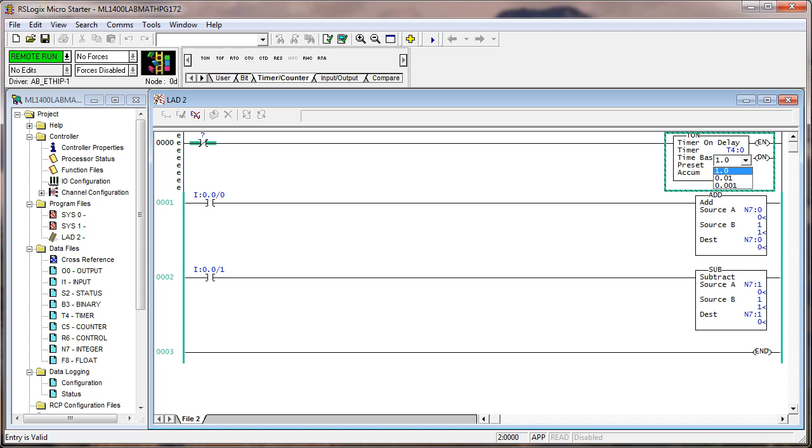Just a little aside from what we're doing here, I'm going to set these back to 0. And I'm going to add some logic. This is how you experiment and learn. So I'm going to do a true if off, then I'm going to add a timer, and we'll make it T40. We'll take a time base of 1, a preset of 1, and then the done bit.

So now we have a free running timer. What's interesting is you can't see it doing anything. Every once in a while you'll see the done light flicker right here. You might see that flicker depending on the synchronization between the video card and the computer, the driver to the controller, and screen update time and everything else.

I'm going to go back and change this. I replaced the true if on input 0 for the add instruction. I replaced it with a timer timing pulse, and the timer is controlled by that input. So when I push the button, the timer timing pulse is true for 1 second, and the add instruction incremented from 0 to 3,397. If I let go of the button, I have a clear instruction that is clearing N70.

So every time I push down that button, it's going to increment and count how many scans occurred during 1 second. What's interesting is it doesn't always come out the same. It comes out pretty close. Let's say that's 3,400.

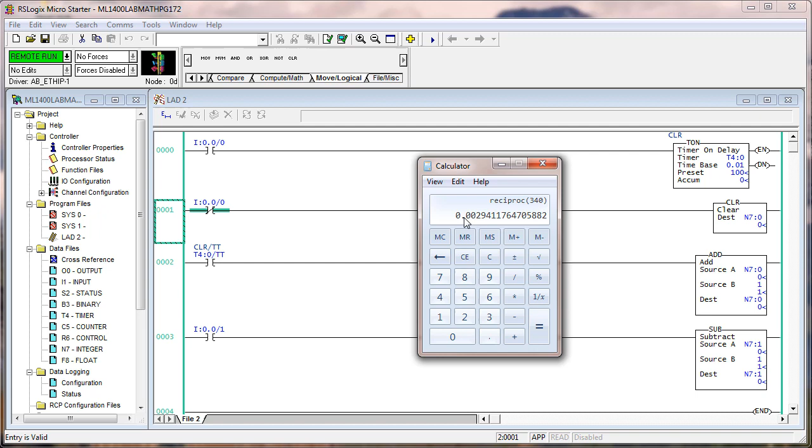Now, if the exponent bothers you, you can always knock a 0 off, do 340, take the reciprocal, and see you've got 0.0029. But we only did 340, so if you consider the additional 0 for 3,400, that moves the decimal place over 1 more place, so it's 0.000294.

That's just a little bit aside, but here's an example of where we're using an add instruction to measure an event count. In this case, it's a scan counter. I don't see any real purpose for a scan counter. There's a zillion other ways to come up with something that'll do the same thing a lot easier than this.

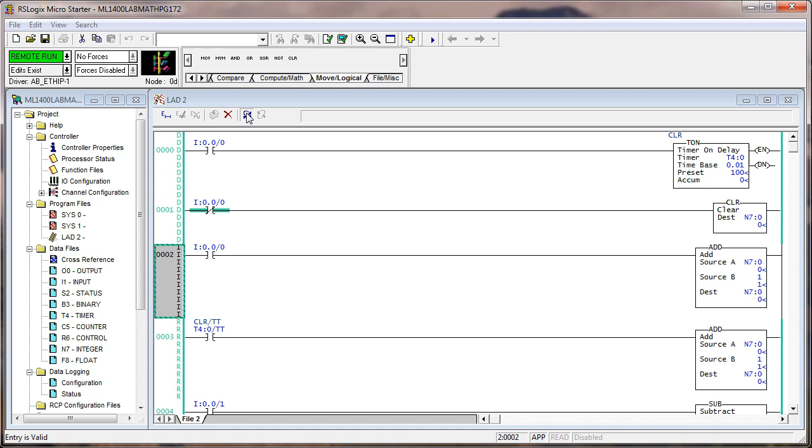We don't want a scan counter, so I'm going to delete this rung, and I'm going to put this in the edit mode and bring this down to here. I meant just to drag the address. Delete this rung, and I've got one rung here that has to be fully accepted. And now we're back to our add and subtract.

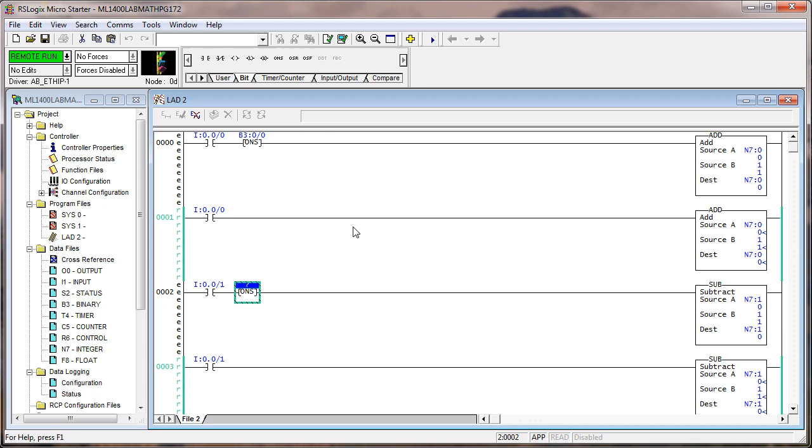The next thing I had you do was to throw a couple one-shots in there. So we'll put these back in the edit mode. We go up, and we put the focus here, one shot B3/0. Go down here and do the same thing, one shot B3/1.

Select that, Control Select, accept. Now we repeat the process of pushing in the push button or turning on input 0. See, it increments by 1. As I can hold it down forever, it's only going to execute one time.

So now we have the add instruction behaving identical to the counter data type, except that we don't have a done bit. Now, as we have an accumulate value that is accumulating the events of the false to true transition to the left of B3/0 one shot, and then the same for decrementing.

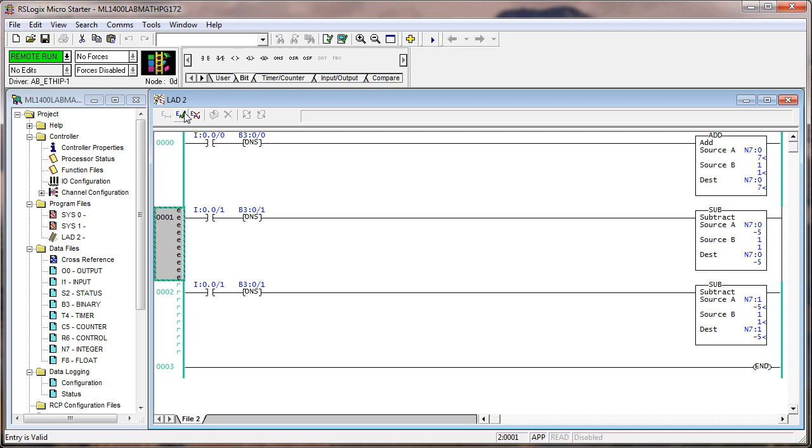If you wanted to make this an up-down counter, we would just change this to N70. That way we're working against the same integer value. Just like the accumulate is a signed integer, so is N70.

Now personally, I use one shot add subtract for my increment and decrement in almost everything that I do. I don't know how many other engineers do that. I did that because originally the counter data type, with that little nuance, if you create a new one online, that it counts once. It used to be worse than that.

That's the only thing you have to worry about now, is if you create a new counter instruction, and if the rung is true, when you complete the edit, it will increment by 1. I don't need a done bit. If I want to do something on a particular count, I'm going to add another rung of logic, and I'm going to use other instructions that you've worked with.

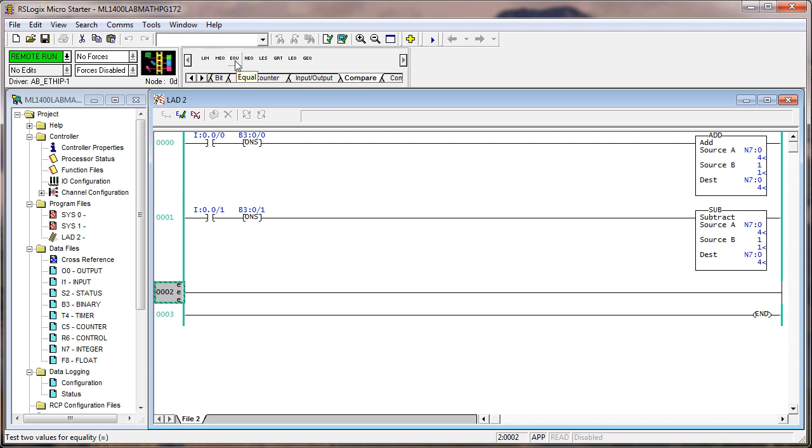For instance, if I use the equal, then it'll only be true when it's equal to that. If I use greater than or equal to, then it will behave like the done bit, so to speak. Of course, I have to throw an output on this, and we'll just use any old bit, we don't care.

And so I'm going to say N70, and by the way, I don't have to type it in, I can drag it over there. If you can see it, you can probably grab it and drag it. You're not really grabbing it, you're grabbing a copy. If these rungs were in the edit mode, then you got to be careful what you grab and drag, okay? But if I point and drag, and this is not in the edit mode, that's exactly what's going to happen. I'm going to get a copy of it.

So let's say we want a preset of 10. And by the way, if I want that preset to be variable in the run mode, then what I do is I just type in an integer address. Now, right now, obviously, 4 is greater than 0. So let's put in our preset of 10. See, now it's not true and that bit is off.

If I increment, see, at 9 that bit's not on. At 10 it is on. At 11 it's still on. See, that behaves just like the done bit in the counter data type. If I increment down below 10, it goes off.

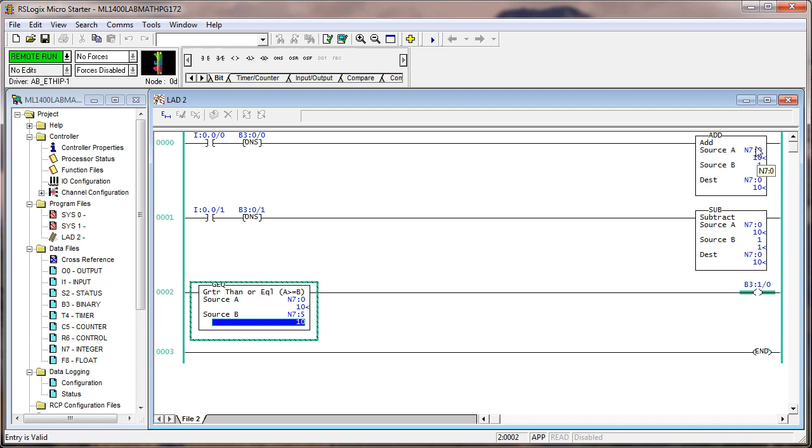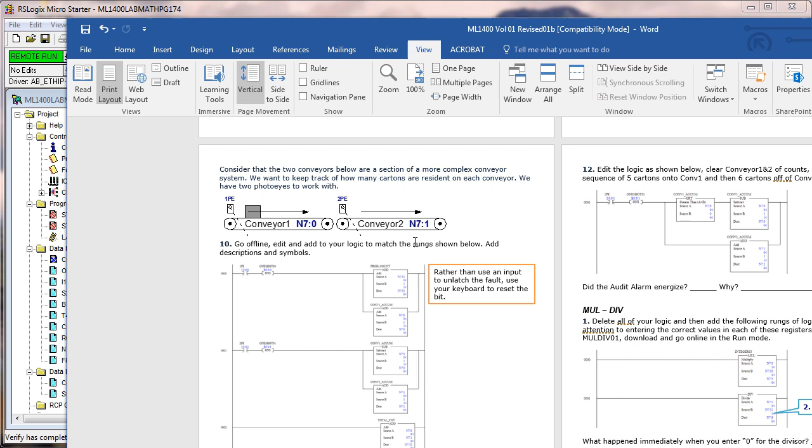Back to our conveyor application. In the manual, I showed you 2 conveyors. And we have 2 photo eyes, and we have N70 and N71. N70 is a signed integer of the count of cartons or objects on conveyor 1, and N71 is a signed integer that has the accumulative counts of cartons or objects on conveyor 2. And then we pursued from there.

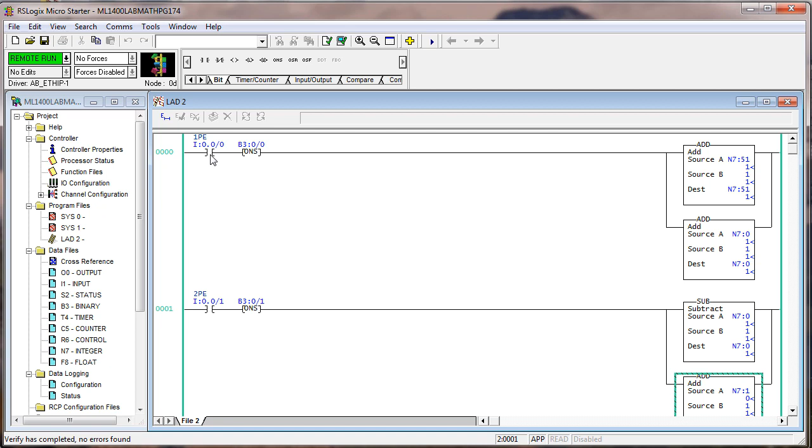The basic idea here is that when I turn off 1 PE there, and remember now we could go add the logic that we had before for using the trailing edge and the timer to eliminate bobble on the carton, but let's just keep it simple for right now. When 1 PE's optical path is blocked, and of course if we had bobble, then it would count too many times. So we're just going to block the photo eye, release, and now we have a carton. We have 2 counts here, N751 and N70. And let me go and add the text on these counts.

1 PE indicates that a carton has moved onto conveyor 1. So every time that the optical path of 1 PE is blocked, like right now, on the leading edge it increments or adds 1 to N751. So now we have 2 cartons. N70 is also 2 cartons. The difference is that the product count, N751, will accumulate without any interaction of conveyor 2,

whereas N70 is just the cartons on conveyor 1, because when a carton leaves conveyor 1 and goes to conveyor 2, and I'm going to block the optical path of 2 PE now, you will see that N70 decrements by 1 and N71 increments by 1. If you scan down and look, you can see this is the total count of adding conveyor 1 and conveyor 2. This is the total count.

And then we are comparing the total count of N70 and N71, in other words, conveyor 1 and conveyor 2. We add those together to get a value of N752, and we compare that to the product count coming in, N751. And if that ever becomes different, then we set an audit alarm, meaning that it doesn't add up.

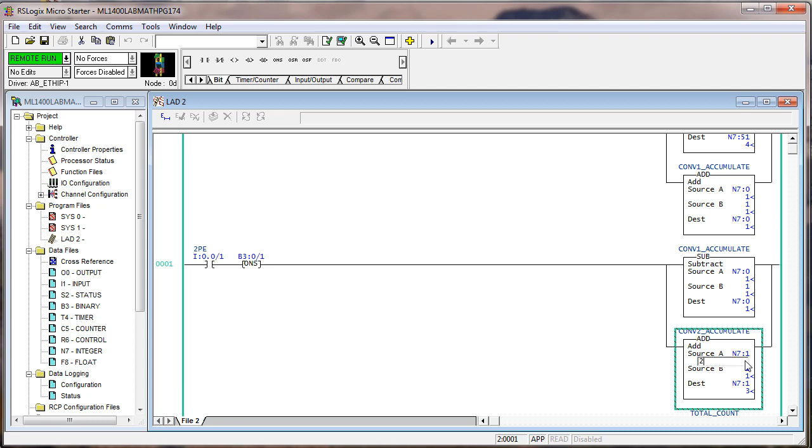Things didn't add up. In order to emphasize that, I'm going to put a couple more on conveyor 1 and put some more over onto conveyor 2. So see, now it adds up to 4, and 4 equals 4. Now let's say that someone comes along and grabs a carton off of conveyor 2. So to simulate that, I'm going to put a 2 in there. And now you see they don't add up. The product count and the total count do not reconcile, and so it sets the audit alarm.

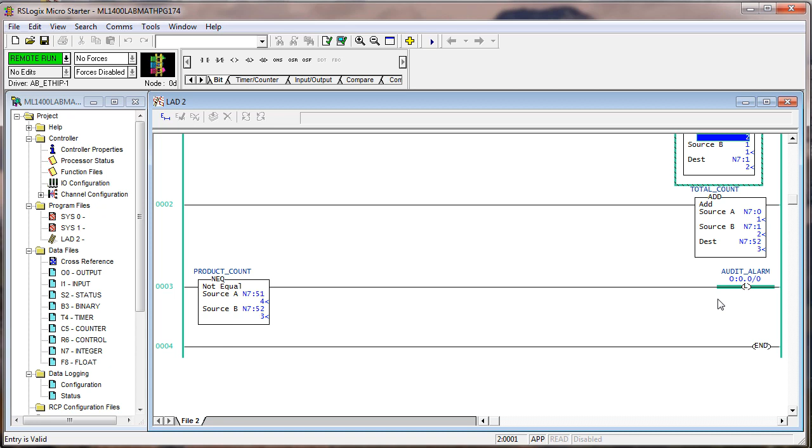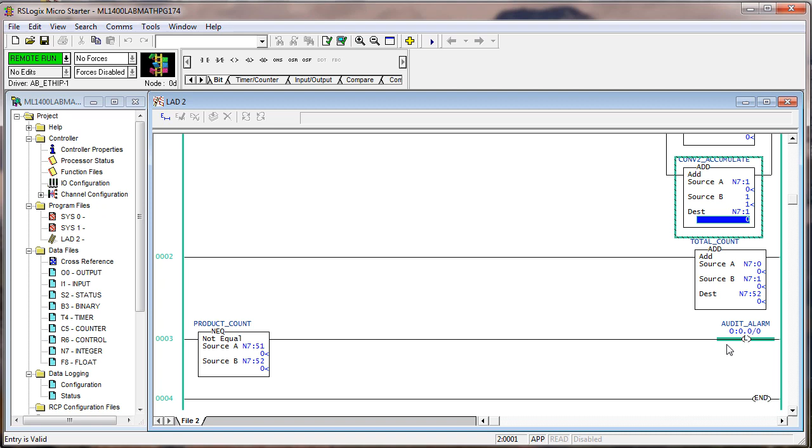There's many ways that this could happen without somebody actually removing a carton off the conveyor, but we're not going to worry about that right now. We're just using the add and subtract instructions in a semi-practical application. The most likely reason for this to happen, and I'm going to clear these by hand so it's all zeros, and I'm going to toggle that bit off. Now let's toggle 5 onto conveyor 1. 1, 2, 3, 4, 5. Now let's toggle 6 off of conveyor 1.

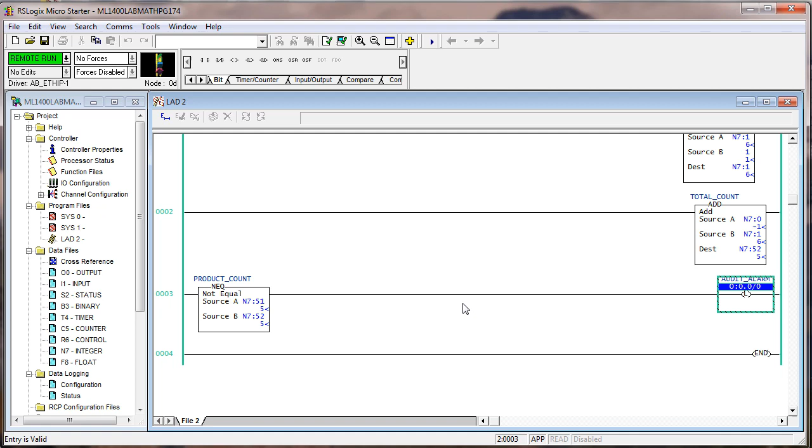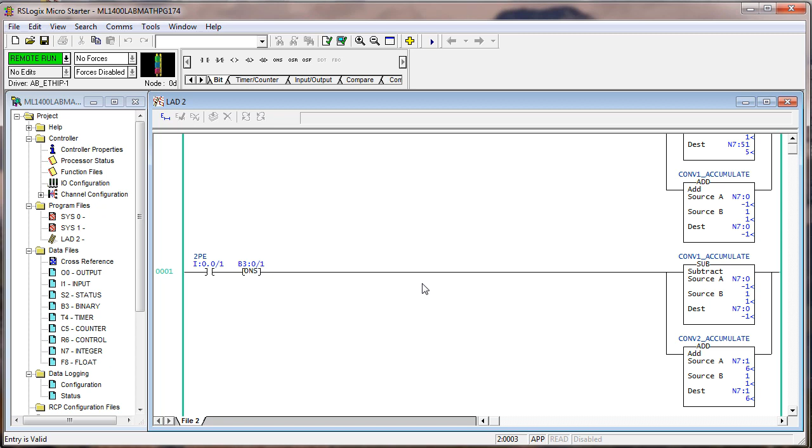There's a problem here. If we add up -1 and 6, we get 5, and 5 matches. Now the way that we could have toggled 6 off of conveyor 1 is if some long-haired leaping gnome walked by and put their hand in the photo eye when there wasn't actually a carton there. That would signify one leaving conveyor 1 and going to conveyor 2. So now we have to make another change to get rid of this possibility of a negative value, because there can't be a minus value carton. Okay, we added a greater than 0.

The Conveyor 1 accumulate value has to be greater than 0 before you can subtract 1 off. So when I hit 2PE flagging, see, it's not subtracted any off of 0. However, it is still adding to N71, so it's adding cartons that are not there.

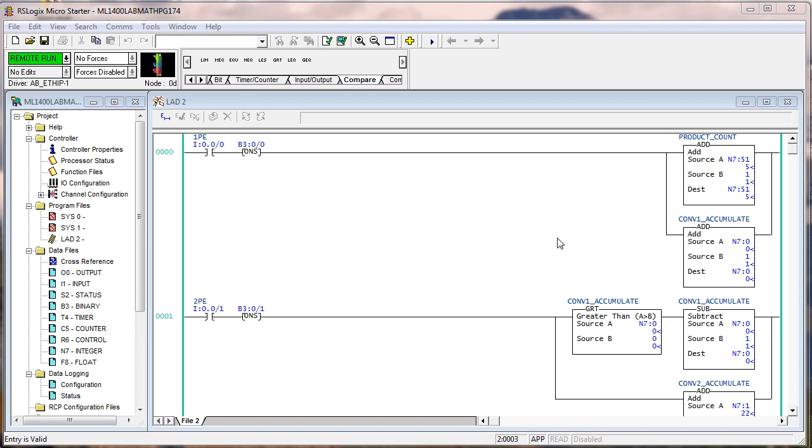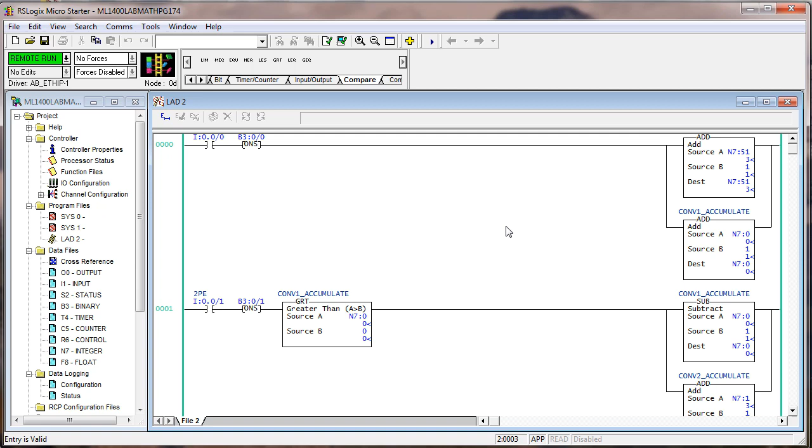This would be a much better solution, and that is to use the greater than 0 for both the subtract and the add function. I'm going to toggle 3 cartons onto Conveyor 1 and then 3 cartons off. Now you see they're at 0. If I go 1 more, 2 more, see, no alarm. That's because you can't toggle off more cartons off of Conveyor 1 than what you toggle on.

So using this greater than instruction, and of course right now you look at that and you see that it's equal. N70, a value of 0 is equal to the constant of 0. You could put in a pointer here, but this is always going to be 0. It's always going to be used as greater than 0, so I would not waste the time making that a pointer because there's never going to be a use for it being anything other than 0.

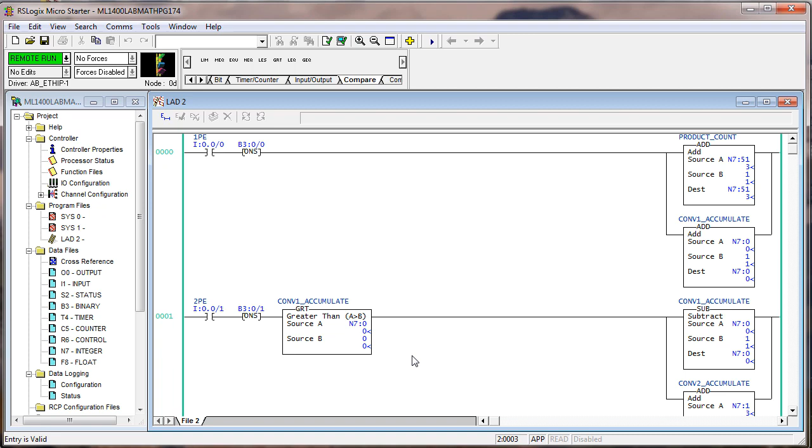In the next piece of the lab we did multiply and divide, which are really straightforward. When I typed these, I did these online. I deleted the other rungs online, added these 2 rungs. Immediately when I finalized them, the processor faulted simply because you cannot divide by 0, period. So you see here I have divide by 0. I immediately faulted. Whenever you get a fault, always go to the error. Don't clear the fault yet.

Okay, minor bit is set at the end of the scan, refer to S5 minor bits. And the S5 minor bits is math overflow trap. And that's usually had a value higher than what the signed integer can represent. So you see the result of dividing 3 by 0 is 32,767. Well, that's not the correct answer. The answer would be infinite. But it tried to calculate a value of higher than 32,767 and immediately faulted.

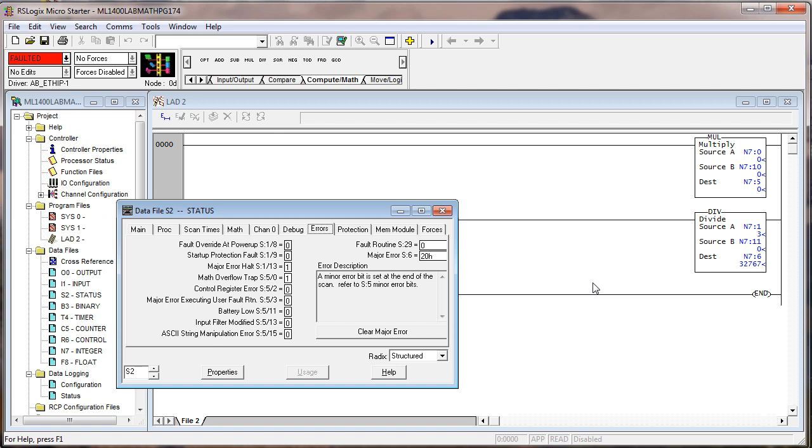You could clear the major error here. You see it goes back to the program mode. However, we want to put in some values before we cause the exact same problem again. Now we'll go back to the run mode, and we're good. 1 times 1 is 1, 1 divided by 1 is 1. And these math instructions are straightforward.

I mean, there isn't any way you can complicate these other than you got to be really careful not to divide by 0. And an obvious way to do that is to do what we did in the last section, and that was use a compare, only this time we want a greater than. So we want N711 to be greater than 0. Now if I make this 0, see, it's not going to fault because it's not executing this division instruction against those values because this is false. N711 is not greater than 0, so this is false and it doesn't execute it.

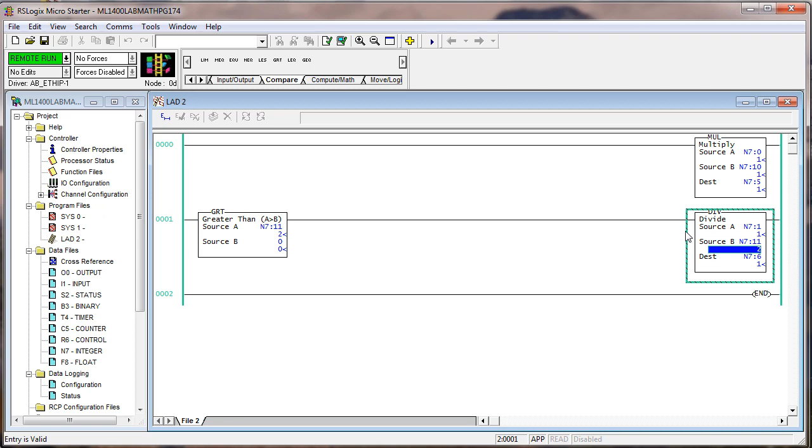If I bump this up to 1 or 2, 1 divided by 2 is still 1, simply because these are whole numbers. They're integers. They're not fractions. If this was floating point, then we would get a different story. And just for grins, I know we didn't do this in the lab, but as long as I said it, let's throw in another division with it. And we'll throw in 1 here. Now you see this is 1 divided by 2 is 1, 1 divided by 2 is 0.5. So if we had used a floating point, we would have gotten a decimal fraction as the result.

And so you can go through and play with these instructions all you want. You just have to be careful not to do certain things. Let's try multiplying by 0. Okay, it will let you do that. That's what we had to begin with. We didn't have any values in here. So it works just the way you would expect it to. You can also use one-shots to prevent a second or third execution if you want to execute it one scan and one scan only.